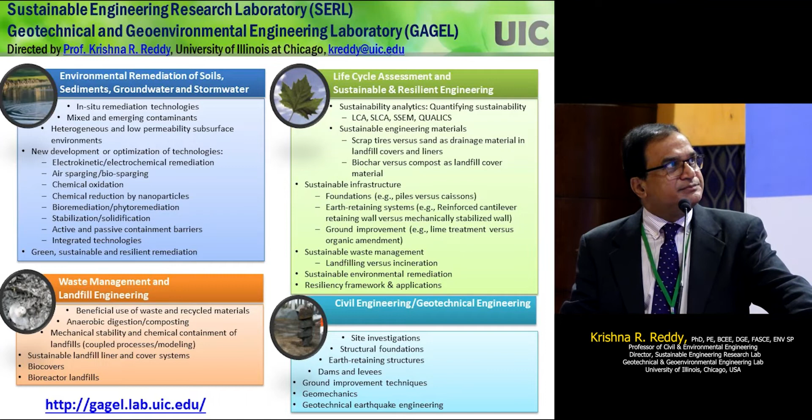I want everyone to take a step back and think about it: what are the grand challenges that we have going forward? I know we're talking about climate change, but let's step back and see what are the greatest challenges in front of us into the future. Of course, this workshop theme is climate change, and that is going to be a grand challenge going into the future because of all the consequences we're seeing. It's going to impact current generations - we are all feeling it - and it's going to impact future generations also.

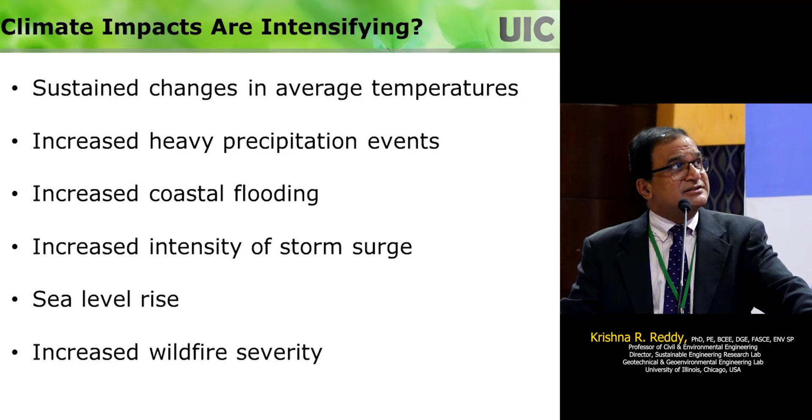And climate adaptation is also known as resilience. And the definition of resilience is this: whatever you are dealing with, it should have an ability to cope, adapt, and grow in the face of foreseeable climate and extreme weather impacts. It could be flooding, it could be extreme heat, it could be sea level rise, over the life cycle of the project.

So hopefully you will maintain some certain performance, and then after the event retreats, your system should return back to some acceptable levels, or in an ideal situation, it should get back to the same as original, or in a very idealistic sense, it should perform even better than what it is initially designed for.

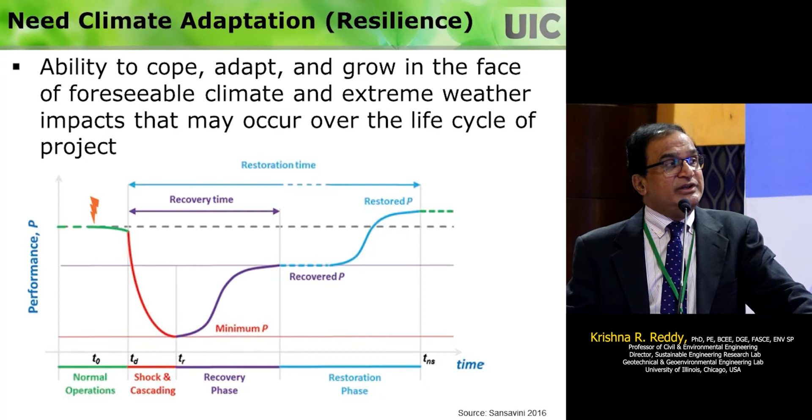So this is the challenge that we have. This is climate adaptation, or designing for resiliency, means we need to be thinking about these things as we go into the future.

So how do we do this? There are a lot of different ways. I call this adaptive management methodology, or climate resilient design framework. So what do you do? You identify the climate change hazards of concern in your area. These climate impacts are very different in different places. If I'm not in a coastal area, I don't have to worry about sea level rise, if I'm inland. So what are the climate change hazards that you have at your location?

Then you identify which ones you're really going to be worried about among the hazards of concern. And then, whatever you are designing, evaluate the performance of that. And if you are compromising the performance, what are the risks associated with that? This is called vulnerability assessment. You need to do this for anything that you are concerned about. So if you have a high risk, then you need to do something.

So you need to look at these resilience measures. How can you change your design? If it's a new thing, you can incorporate it in a new design. But if it's an existing system, what can you do to make sure it does not undergo damage if this perceived climate change hazard really happens? So you look at different options. You will have multiple options. Out of multiple options, you prioritize which ones are effective, then you select that measure to be implemented. This is called resiliency measures selection.

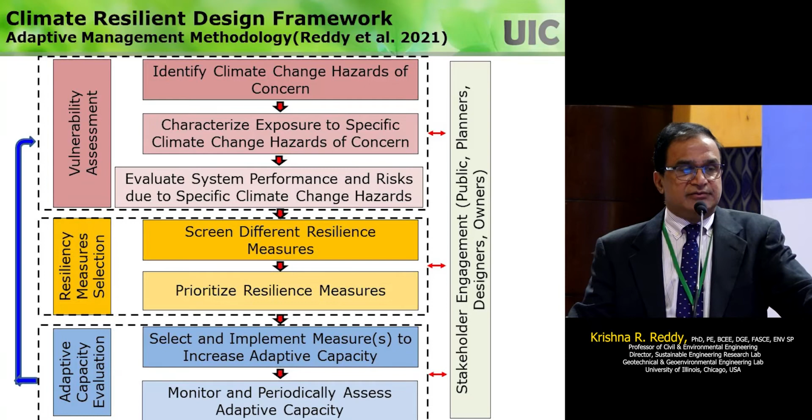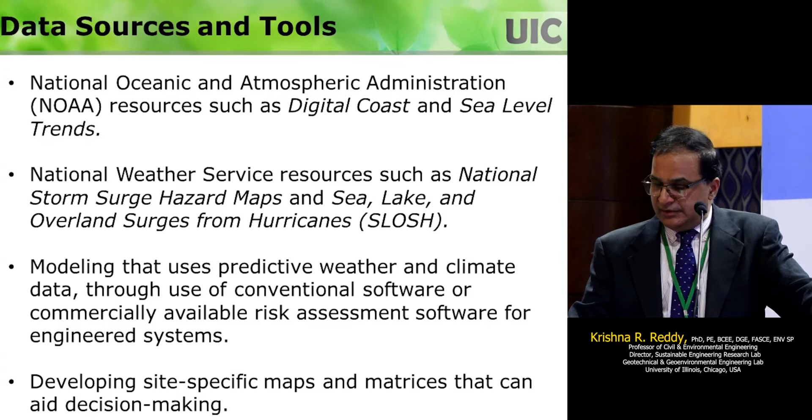And in the US, we have a lot of data sources and tools to look at these climate hazards. We use NOAA and National Weather Service data, and we do some modeling, and we can develop site-specific maps and matrices for design decisions. So one of the biggest things is, what hazards do we need to design for?

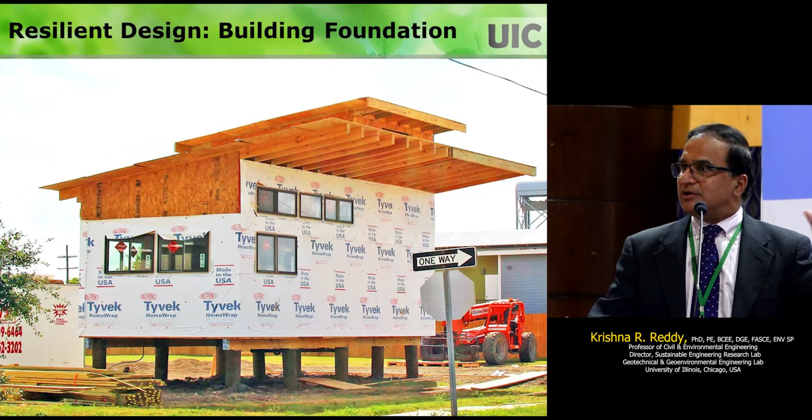This example clearly shows a lot of things happening like this in the US in actual designs. And this is actually built - this is a library building in New Orleans.

You just don't want to say, oh, I have a foundation raised, and I'm not going to have any problems. You need to be proactive. You see on the back of this library is a green infrastructure that allows the infiltration of the rainwater, not allowing this flood water level to increase. So you need to be proactive on multiple fronts.

So what is predicted, based on sea level rise, is that if sea level rises as predicted, this whole railroad track is going to be underwater. The whole thing is going to be underwater, so this railroad is going to be out of business. So what we are doing, what is planned, is this.

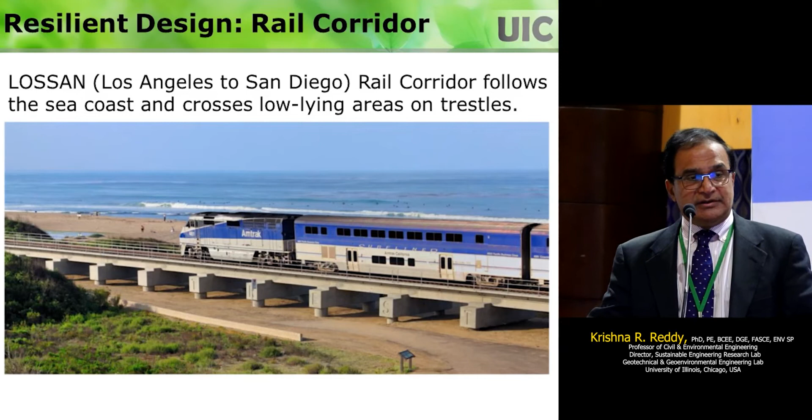So what you have to do is think about, if you are looking at new systems, you want to design it such a way that it can be modified to accommodate the future impacts.

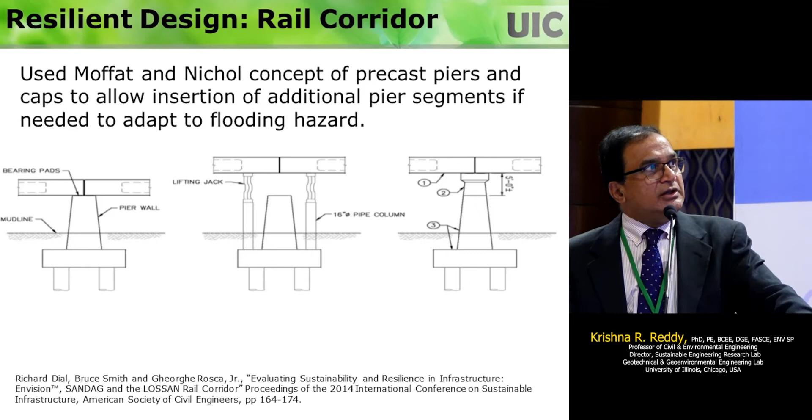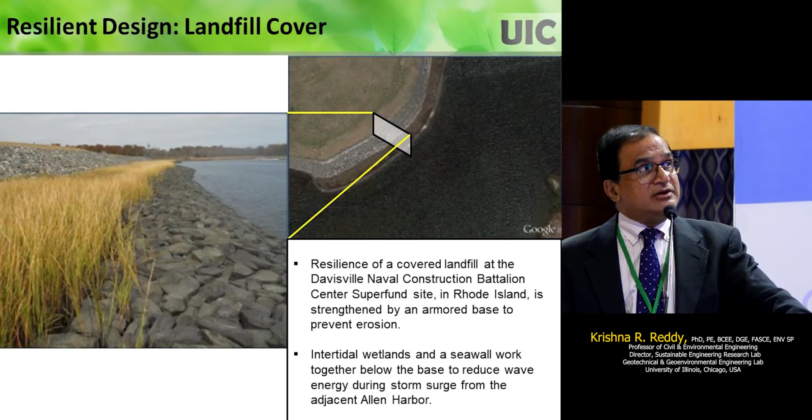So those are the things that we are doing. Those are called adaptive measures or resilient designs. But that's a temporary solution, right? You're not addressing the root cause of the problem. So adaptation and resiliency options are going to be limited or very challenging if we have continued greenhouse gas emissions. That's the root cause of the problem. That's why we also need to focus on reducing greenhouse gases, which is the root cause of these climate impacts. That's known as climate mitigation.

A lot of work is going on at many different levels. IPCC came up with this Working Group 3 report on mitigation of climate change, and a lot of cities in the US have their own climate action plans or climate mitigation plans. If you look at the IPCC report, what can be done to reduce greenhouse gases, they identified different mitigation options in different sectors.

Energy is one big thing. They estimated how much greenhouse gases could be reduced in these different sectors. Energy sector is one big thing, agriculture sector is another. I'm not going to go into all these details, you can get the IPCC report and look at it. If you want to make a big impact on reducing greenhouse gases, what are the things you should be doing? These are the things.

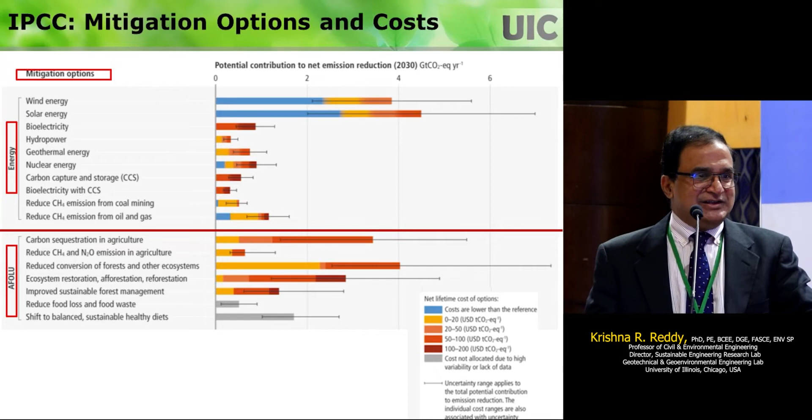Buildings are going to be huge greenhouse gas emitters, and transport and industry are another. So you can look at all these different fields, and there are different options you can follow to reduce greenhouse gases.

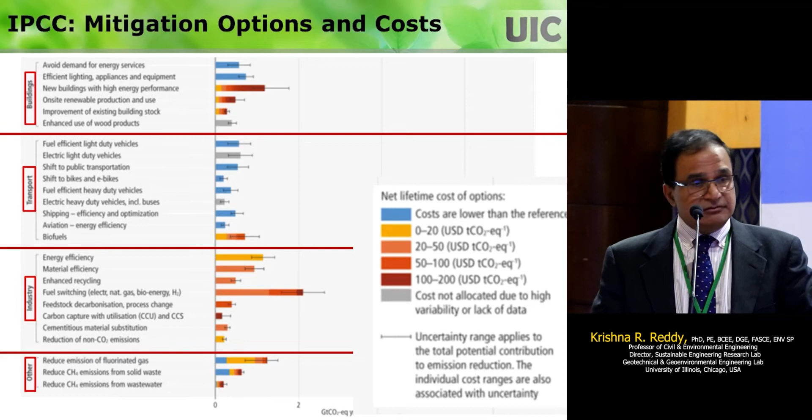Chicago, the city that I come from, just released, last week, their climate action plan. They had one, and they updated it. A lot of people say carbon neutral, but Chicago, being very honest here, they're going to have a 62% reduction by 2040. A lot of people say zero, but zero never happens. Here is a practical way to reduce greenhouse gases.

But in the process, we should be looking at co-benefits. So how is it going to benefit the people? How is it going to benefit the economy? These are all the things that you need to consider when you are planning these things.

So the resiliency, I mentioned about it. Climate mitigation comes as a part of the sustainability. Basically, in the long run, we want to have a good economy, good environment, good society. So sustainability is a kind of mitigation plus more, to look into having a really sustainable development into the future. The resiliency is taking care of these impacts that we're going to see. They overcome the unexpected crisis, adapting to turbulent change, and flourishing in a chaotic world. So you need to make a distinction between these two things.

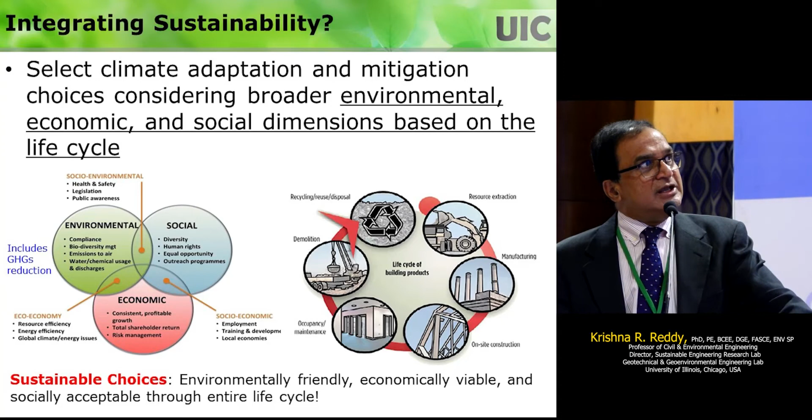So the sustainability projects get confusing, but you need to realize that sustainability can be at different scales: global scale, national scale, regional scale, business or institutional scale, or sustainable technology scale. Maybe a lot of work that is being presented here could be at the regional scale. You can contribute at any level. So in my case, in teaching students in my university, I focus on the last one, sustainable technology scale.

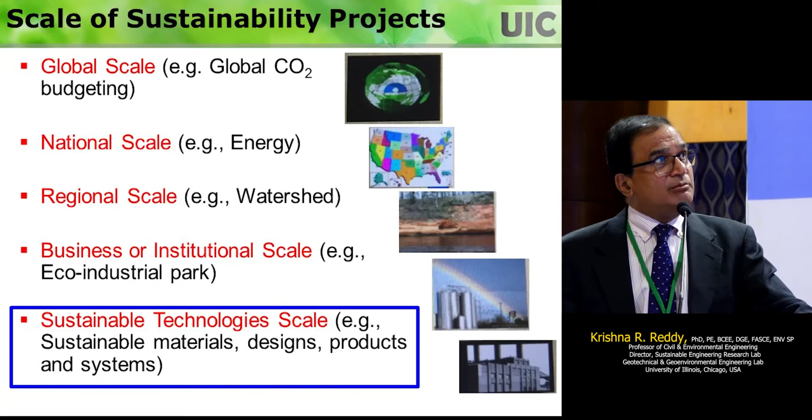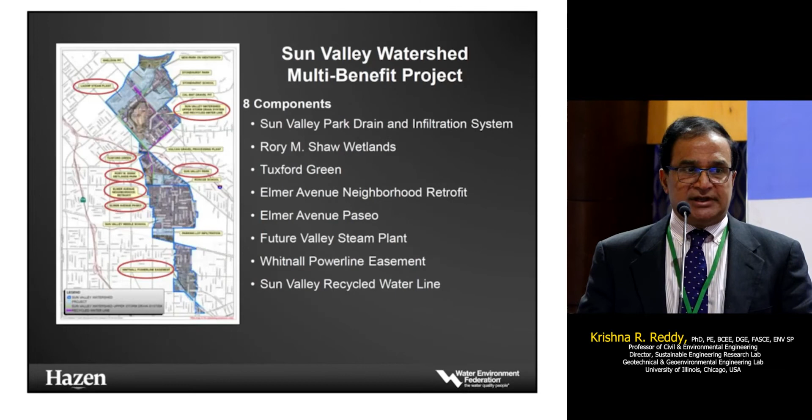And these kinds of things are happening in the US. So this is Sun Valley, a location in California. They have all these flooding problems. And they wanted to come up with a sustainable solution for this. They came up with this drainage and underground infiltration system, and they applied this tool, and they were able to change the design to maximize the sustainability benefits. Based on the rating tool, you can score what is the level of sustainability that is incorporated, and there are rewards depending upon how much score you get.

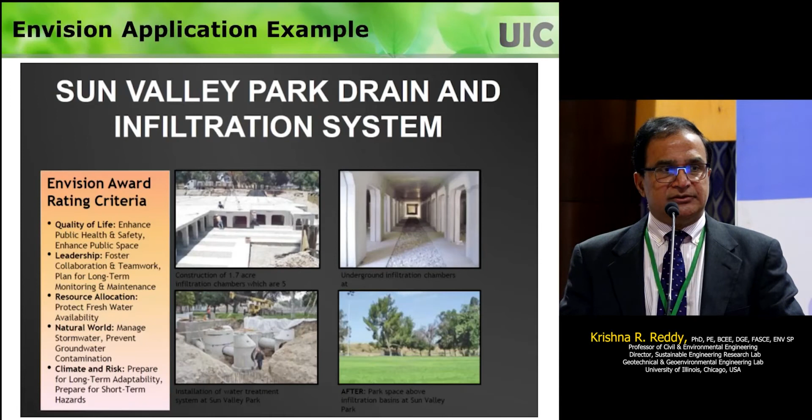On the other hand, that kind of rating tool is good for applying at a regional scale, but I was looking at more of a project component level. So I developed this tool, it's called TQUALICSR, basically a tiered quantitative assessment of life cycle sustainability and resiliency. It integrates the technical aspects, resiliency aspects, and sustainability aspects.

So this is what I'm trying to promote, in teaching and also in industry, to day-to-day engineers. This basically has 4 phases, and each phase has a step-by-step process that you can follow.

A lot of times people want to do resilient design, sustainable design, but they don't know how to start. So this is kind of a roadmap: step 1, step 2, step 3, step 4. Doesn't matter what you are doing, whether you're designing a beam, a column, a roadway, anything—this kind of protocol works.

So the first one is all about addressing the resiliency. First thing that you need to look at is making sure that your design is resilient to the climate impacts.

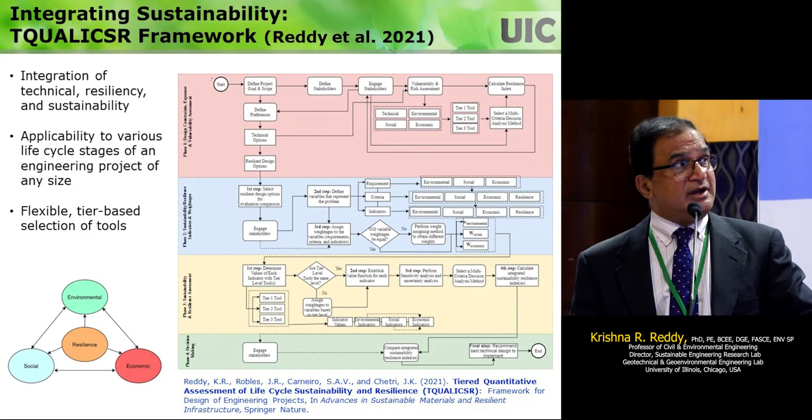As I mentioned, we follow this adaptive methodology, and one thing you need to do is quantify the resiliency. You'll have multiple options, and for each option you can come up with indicators and metrics, and calculate the resiliency index. If I have 2 or 3 different options, I can look at the resiliency index for each—the one with the highest resiliency index would be the best thing. And then you choose the

possible resilient options, and then conduct the sustainability assessment. The sustainability assessment is all about looking at environmental indicators, social indicators, and economic indicators, and also adding the resiliency indicators, having metrics for them. So you need to be able to calculate those metrics.

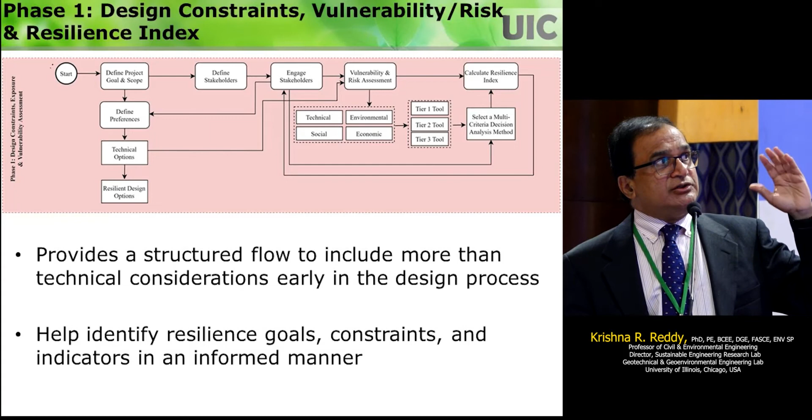And this is where it is challenging. This methodology will allow you to use any information that you have—it could be qualitative or quantitative. It's very flexible. Sometimes you just have best management practices, so you can still incorporate those things.

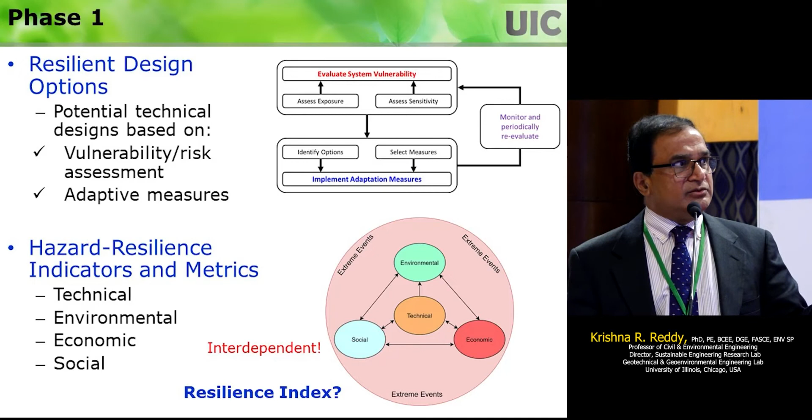Semi-quantitative, more like rating tools, or you have a life cycle assessment, more detailed quantitative tools. So this methodology can allow you to input whatever information you have, and then do this assessment. The tiered approach is the one I've been recommending, because a lot of times when you do these assessments, data limitations is the biggest problem.

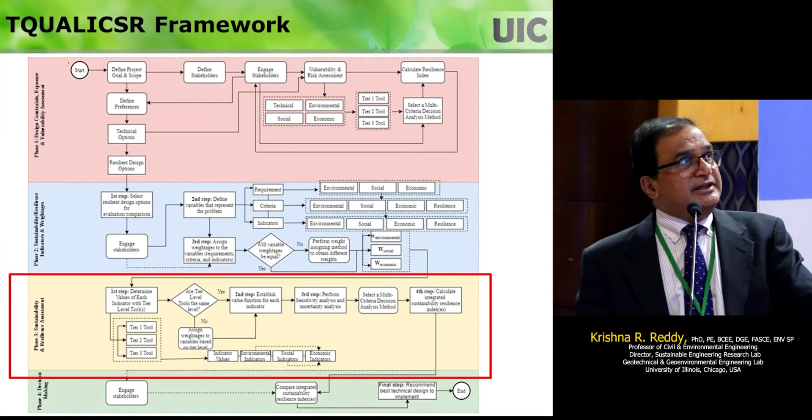And so in phase 3, finally, once you have that, you can calculate the sustainable resilience index—how sustainable it is, how resilient it is. So that is the final output you get.

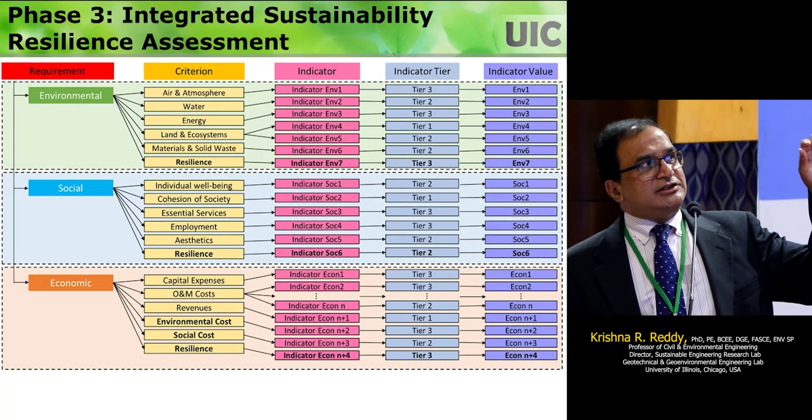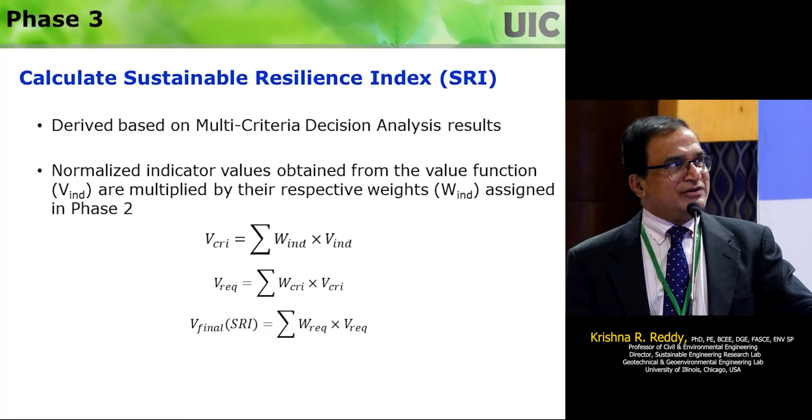Once you get that, in the framework you see that there is stakeholder engagement at every level. You cannot do anything without stakeholder engagement. Each phase has this stakeholder engagement. Sometimes these numbers don't matter at the end—decisions are made by the stakeholders, whatever they prefer. So the budget is one thing, and social acceptance, what people accept, and stakeholders' preference is the other.

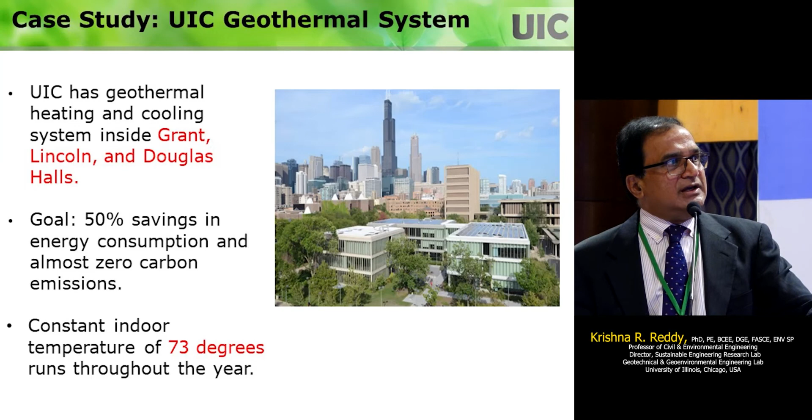So just to show you how this could be applied, we have a geothermal system. The buildings are powered with that, and the other option would have been using the conventional heating and cooling system. So, is using geothermal resilient and sustainable?

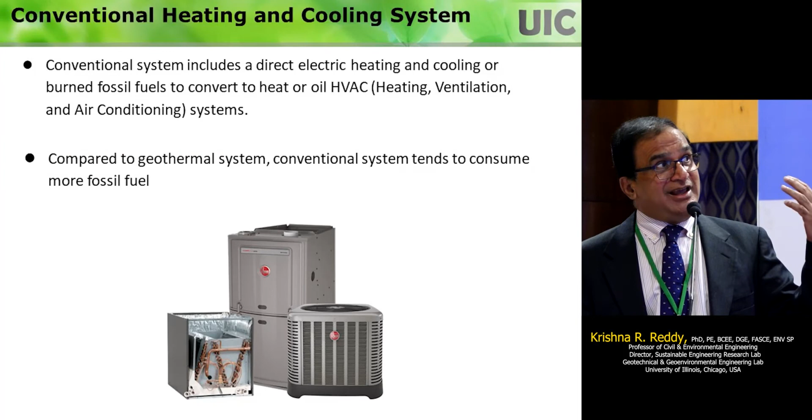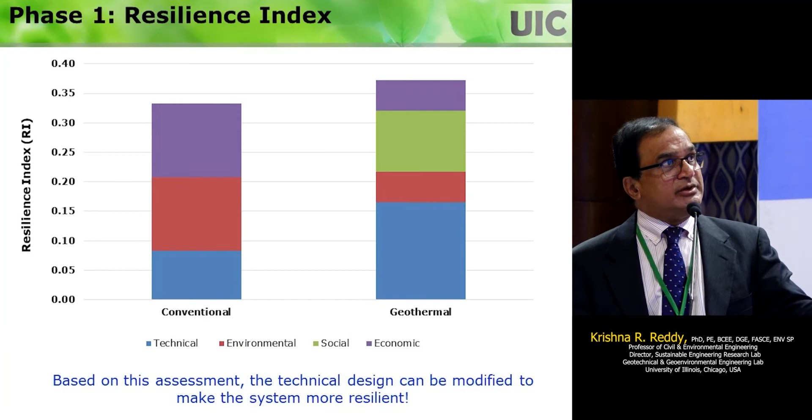So I applied this framework, and then I looked at the resiliency aspects, and calculated what the resiliency index would be. There's not much difference—this geothermal is slightly higher than conventional from the point of view of resiliency, coping up with extreme heat, for example, in Chicago.

But as I told you, the final decisions on all of these projects are not based on the numbers. The numbers guide you towards rational decisions, but a lot of final decisions are made based on these other factors. So I just wanted to mention that.

One of the things we are doing now is looking at resilient and sustainable designs—which ones have a possibility. For example, in coastal areas we used to put these concrete seawalls. They are not resilient, they are not sustainable.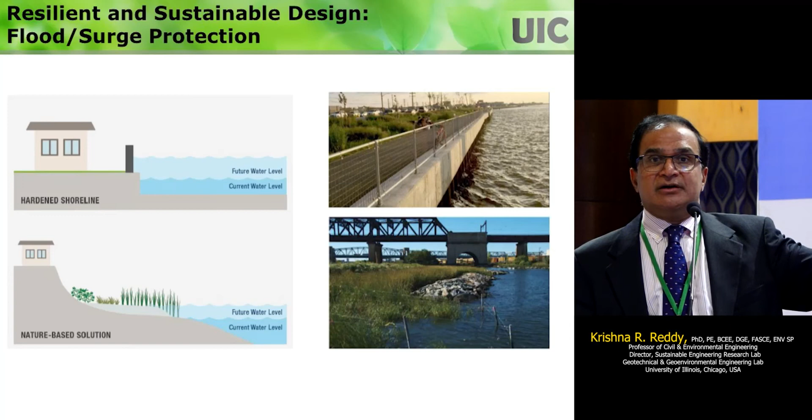So we are looking at floodable parks as an option, where if a surge comes or sea level rises, the park is going to be inundated. But that's okay, nothing is going to be damaged. So we're going into these nature-based solutions extensively.

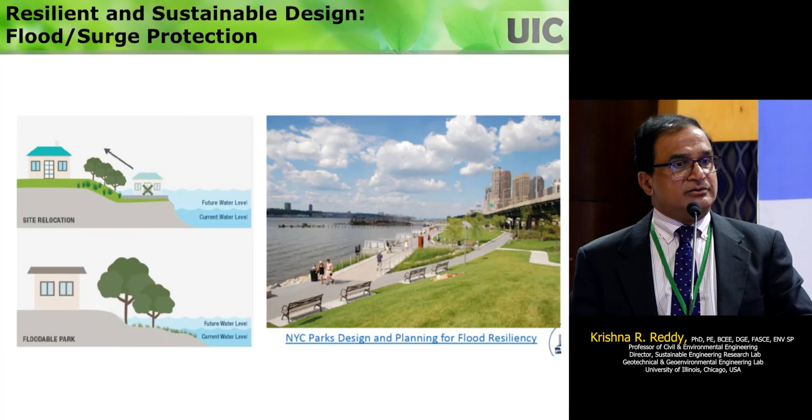Even in New York, we are using these floodable parks. This has become very important from the lessons learned in New York with Hurricane Sandy. Now they've mapped what areas are going to be affected by future hurricanes, and they're looking at these kinds of systems.

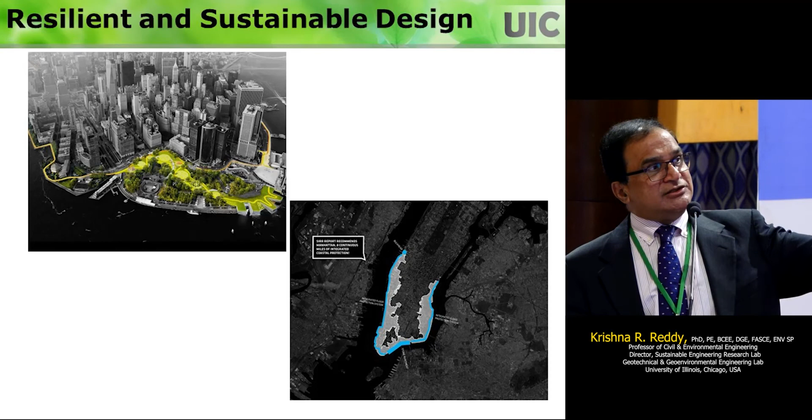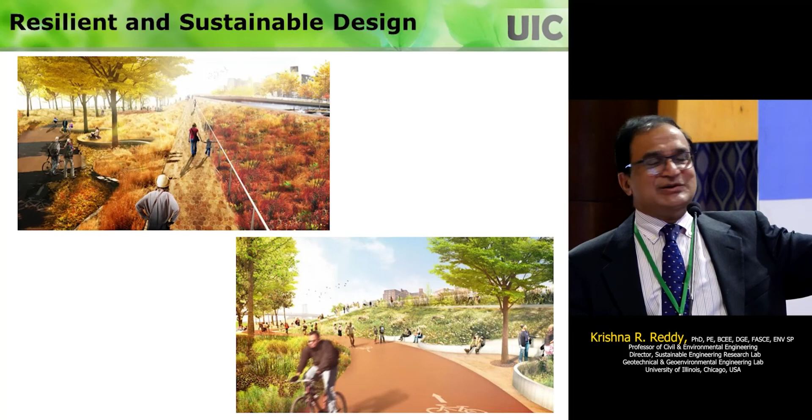I wanted to mention this because instead of having a seawall, they are constructing these parks in a clever way. As you see on top, it's a park with stairs where people can sit and enjoy the ocean. But when a hurricane comes, people run away and go home, and that steps you have becomes a retaining wall system. So as the water level rises, the other side, the city, is not going to be flooded.

This is kind of resilient and sustainable design, with social and economic aspects, all those things. Again, this is a park, one side is the ocean, and the other side is the city. And look underneath this, the train track is ugly, so they want to convert this into an area that could be utilized.

Again, you see on the left side the stairs become like containment if the water level rises. So when water comes, the stairs protect the other side of the city, and you can even have systems that are hinged, so they can lift it up to increase the height if you want. There's a lot of work happening all over the world to make sustainable and resilient designs, all based on nature-based solutions.

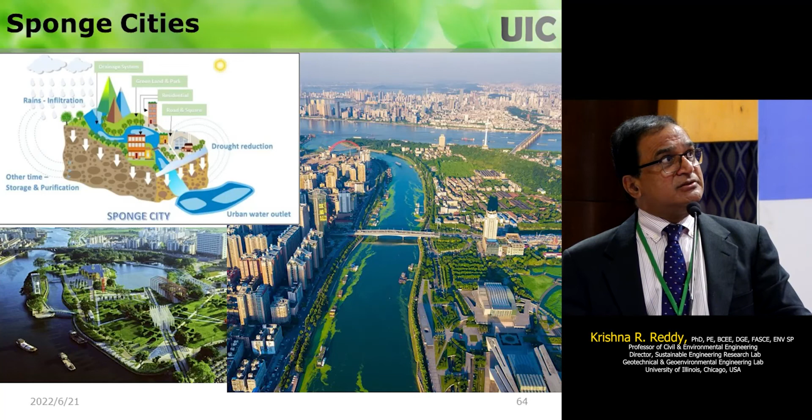The reason we need to do this is that there are terms people use, non-stationary, uncertainty, unknown unknowns, because the predictions have a lot of uncertainty. So you need to take a step. There are a lot of studies that look at it: the longer you predict, the more uncertainty there is. So if you predict for a shorter duration, you have less uncertainty. So you go in that step. That's the first step in terms of climate adaptation.

But climate adaptation is only a temporary measure, right? I mean temporary in the sense even though it runs for many years, but I call it that. In the long run, the solution should be climate mitigation, so we need to focus on controlling the greenhouse gases. These options are very impactful, and we should look not just at reducing greenhouse gases, but also reap the co-benefits. That's on climate mitigation.